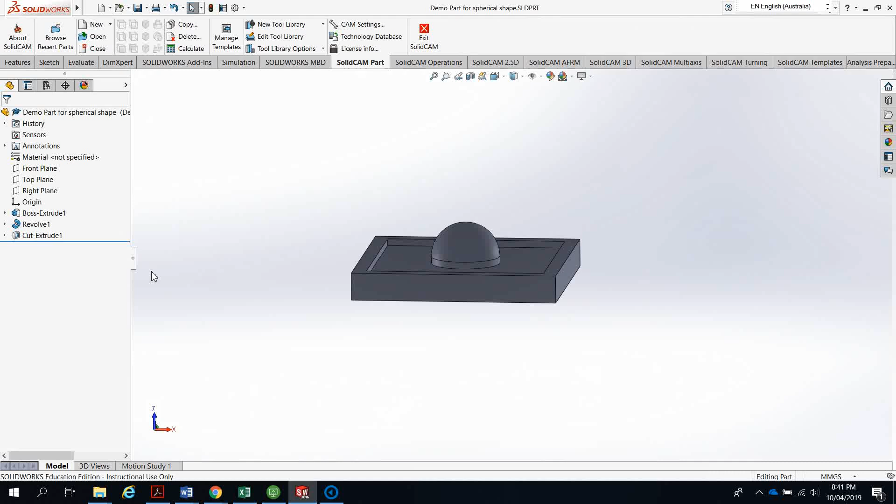Okay, so welcome to today's tutorial, and what I'm going to cover in this tutorial is going to be the cutting of the spherical shape using the SolidCAM package. So this is an example shape. It's not exactly the same one you have, but the spherical shape is once again going to have the radius

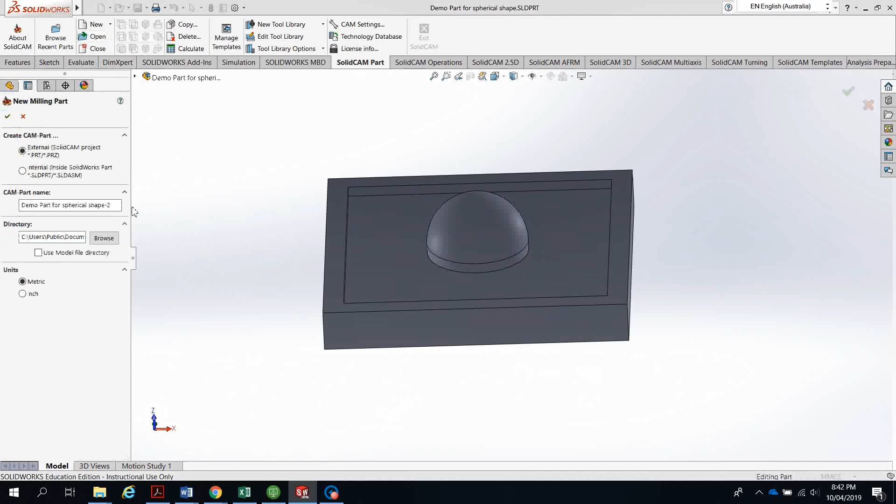of 25 millimeters. So first we are going to start with doing the new milling part, and we are going to use this one as an external part. In metric, say OK, and now the first thing we're going to do is choosing our machine. I will choose any machine, it's not going to be important now. I hope it's going to work as we wish it to work.

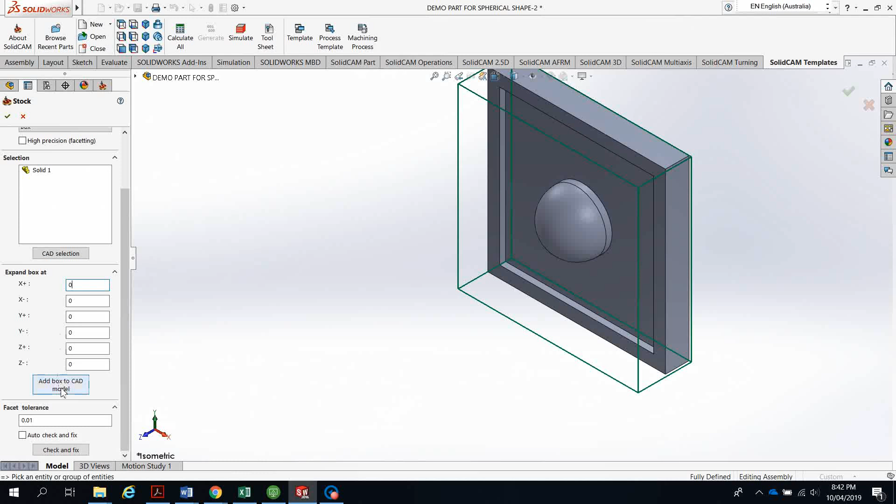So the second step is choosing the stock material. So you choose the part, and the software is going to generate the box around it. Now the most important thing is just remove the expansion of the materials. I don't want to have an expansion for that, because maybe I'm not going to do the cutting. Okay, and 0. Add the box. This will be very important to have the box around the part, and then say OK.

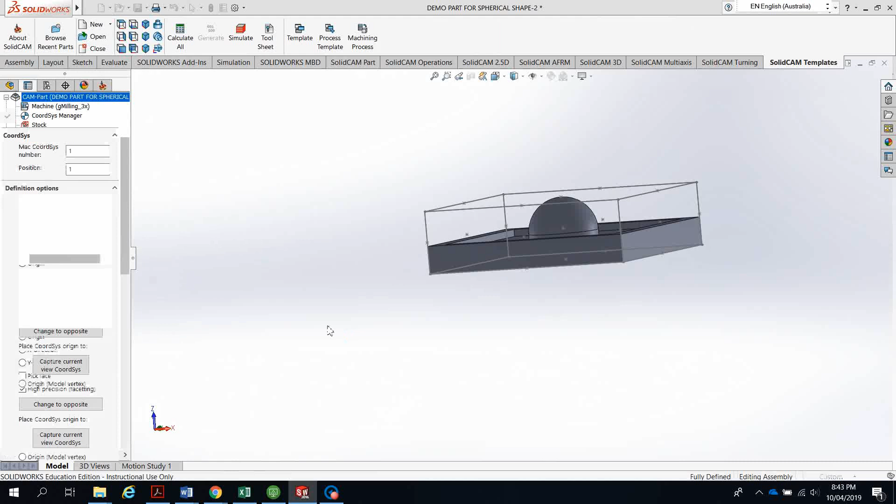Okay, I can't find the box. Stock. The box. Anyway, close. Okay, now the next step is going to be using the coordinate system, and because my system doesn't have a lower face to select, I will define that.

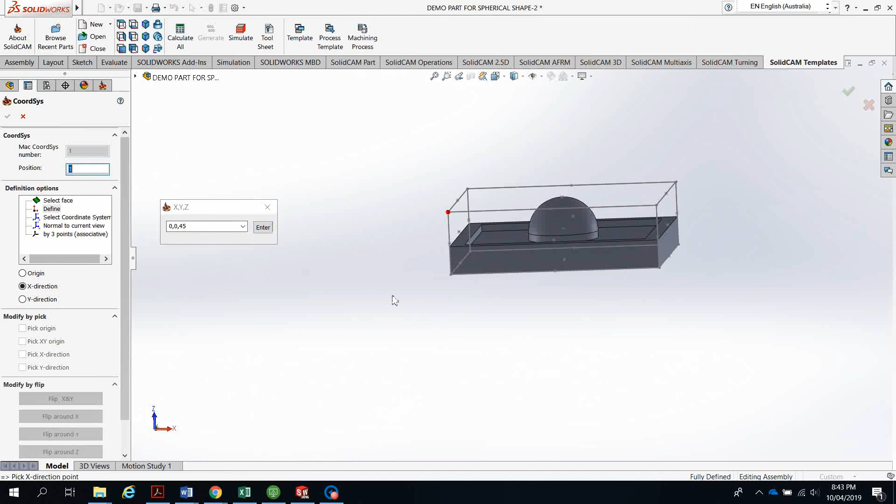Now this point is the 0 point, 20 millimeters, another 25 millimeters. This will make it 45 in the Z direction, but the X-axis is going to be 0, 0 for the Y, and 45 for the Z-axis. Enter that. The red point showing at the corner of the box, this red point is my datum point.

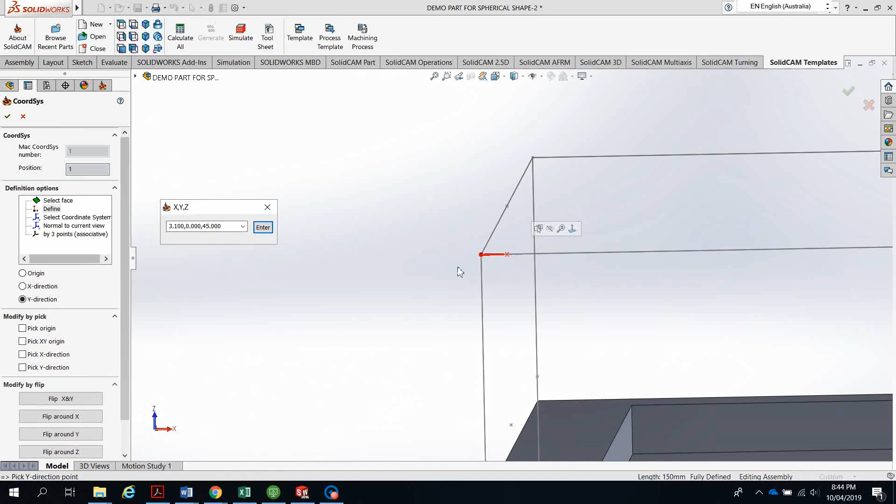The next step is we have the X direction highlighted. I will choose my X direction with this box. Choose a different axis. Just give me 1 second. Okay, now I'm going to invert that. Yeah, that's the X-axis, and this is the Y-axis, and this will be the Z-axis. So these are the coordinates I'm going to use.

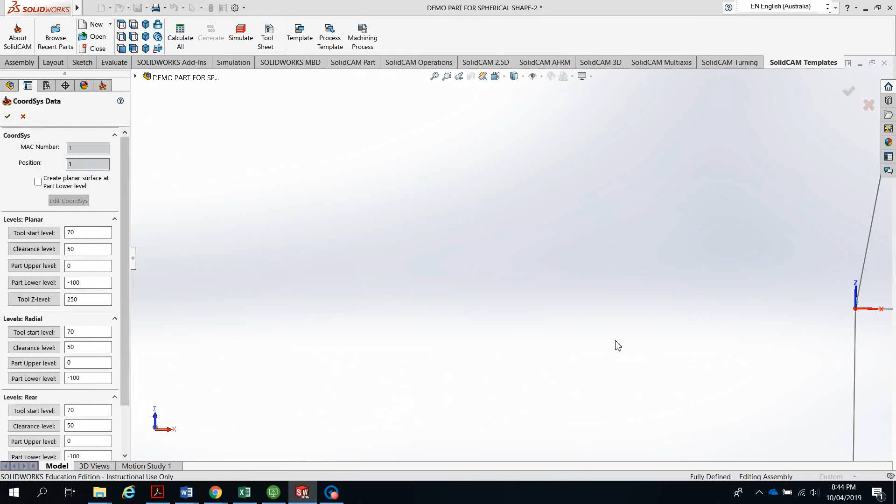So as you can see, the most important thing is when you have an error, just simply make the changes directly. Now accept that, and this will generate my coordinate system at the top of the block. I'm going to start to work on it. Accept that, accept the position you choose, and then we are going to go for the next operation, which is going to be the machining.

Now just remember, you're not allowed to use the iMachining now. You're not allowed to use the iMachining. Instead, we're going to do the step-by-step work until we finish the cutting, because it's required to do the simulation for each step individually.

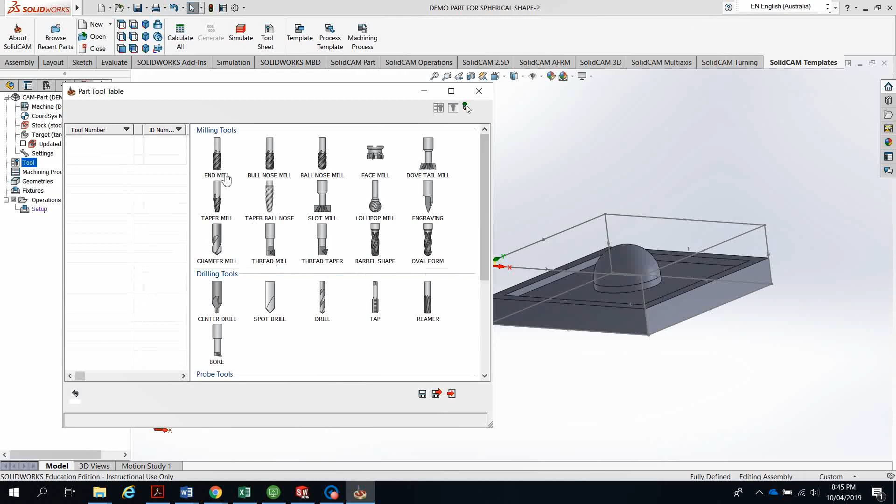Now for the selection of the tools, we can select tools from the list we have in the library. Now just remember that we have a face milling and we have a spherical shape, so we need to have at least 2 cutting tools. One of them is going to be the end mill, the other one is going to be the ball nose. So I'll go with the end mill cutting tool. I will change the dimension to be 10 millimeters diameter.

And now for the shoulder length, because I'm going to do the cutting for 25 and 5 millimeters, this will make it equal to 30, so the cutting length, the CL, is going to be 30 millimeters. Accordingly, the shoulder length should go up to at least 35 millimeters. Okay, now we're done with tool number 1.

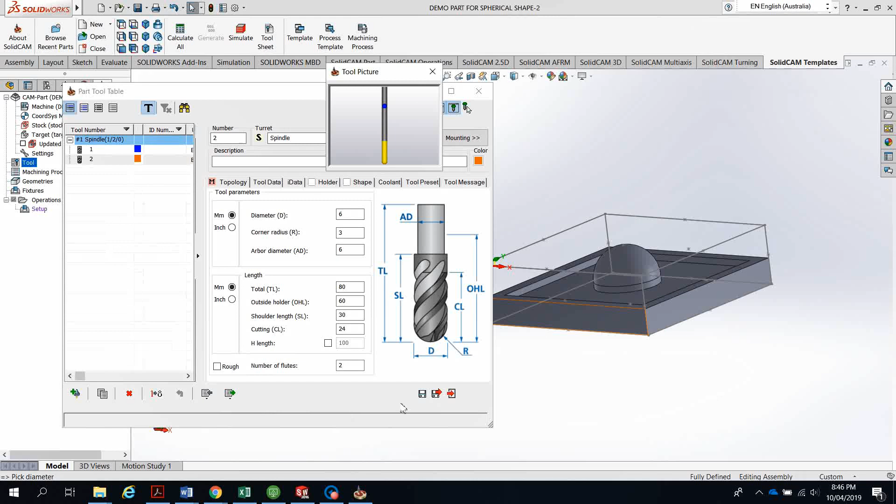Save this one and go to choose the other tool, which is going to be the ball nose, and I'm going to leave the dimensions as they are. So we can simply save and exit, and start with the operation. Now once again, from the list, add milling operation. You're not allowed to use the 2D and the 3D iMachining. You're only allowed to use the 3D milling.

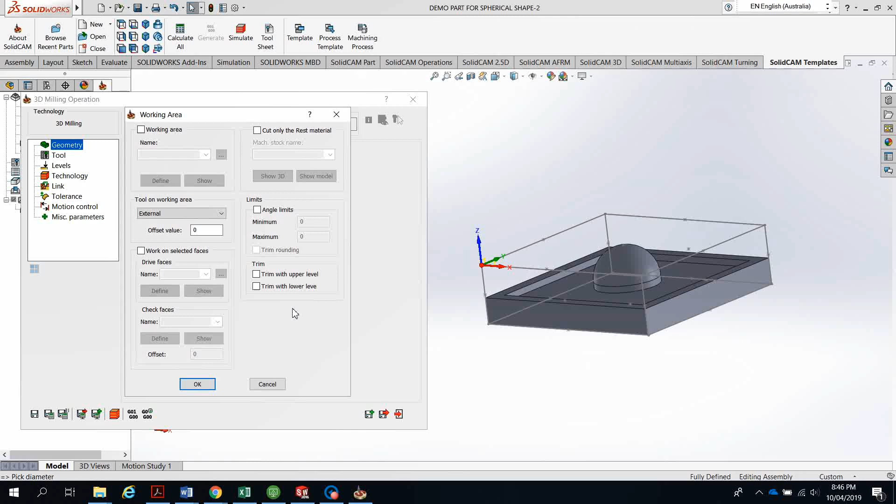Now for the 3D milling, we're going to choose the first operation and first define the working area. So the working area is going to be anything between this ring, that means after the cutting I'm going to have a cylindrical shape, and the outside is going to be this edge.

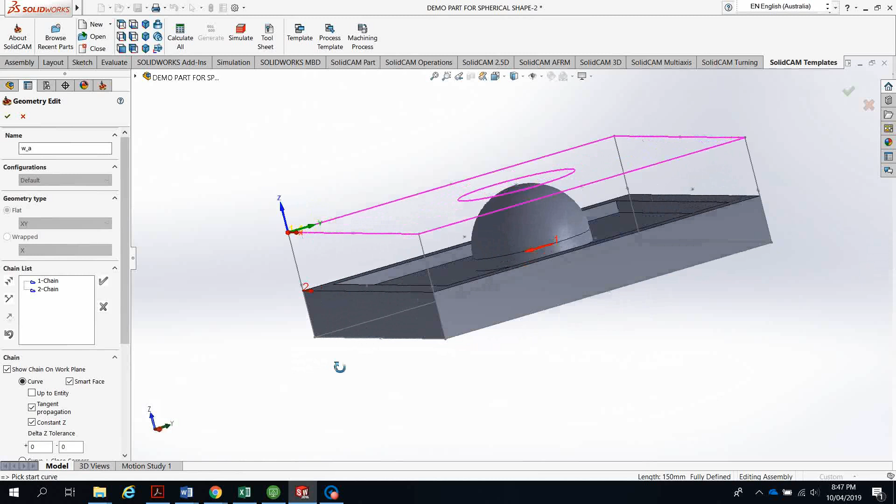Say okay. Now what's happening is that I'm going to cut anything between this circle and this square shape. Press OK. I have to define the face I would like to go to. So define that, and this will be the face I'm going to work to.

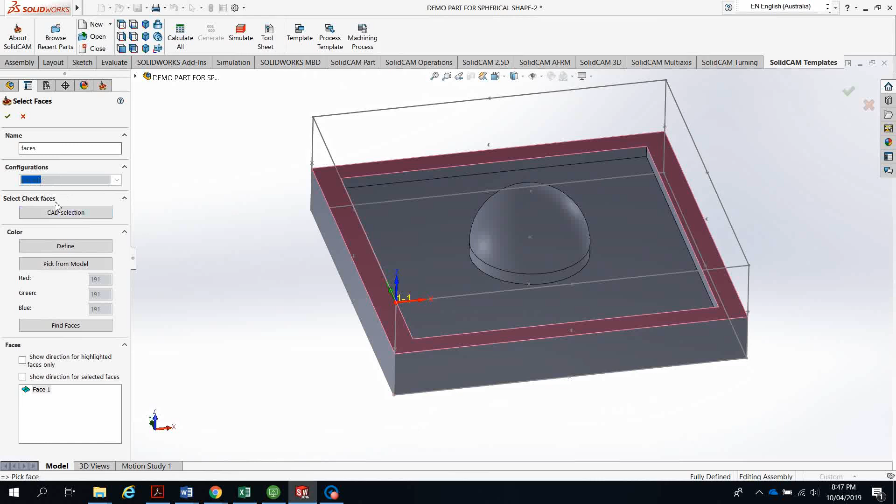I think that the configuration is going to be quite small, so I'm going to leave this stage. I'm not going to define the face now. Instead, I'm going to choose the level to tell the machine what to work to. Now that's okay for this one, and I will go for the tools, and the tool I'm going to use is going to be the flat cutting tool number 1. Say okay. Now it has been selected.

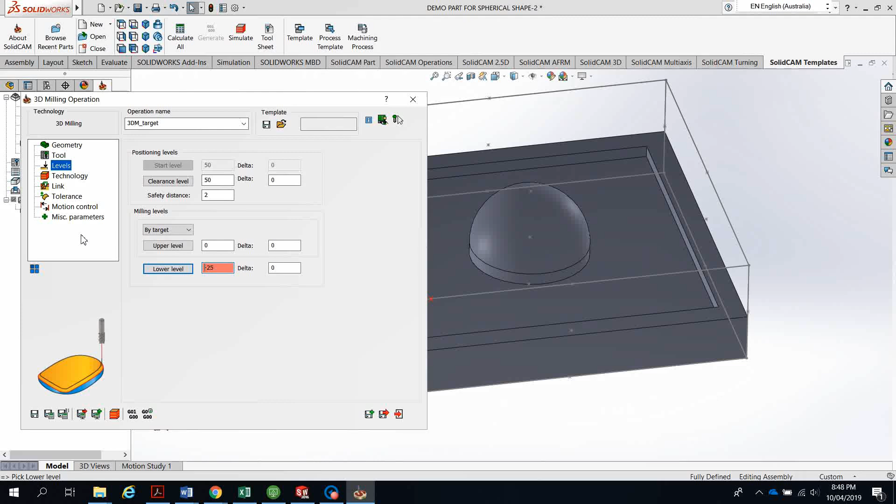The levels: my upper level is going to be 0, the lower level is going to be selected to be that, so it's -25. Say okay. Now the technology I'm going to use is going to be the contour cutting, and be sure that you are going to have acceptable values for the overlap and for the step over. That means the depth of cut for each time. You are going to select the depth of cut depending on your material. It's going to be the aluminium. The wall offset, I'll take this one to 0 and 0.

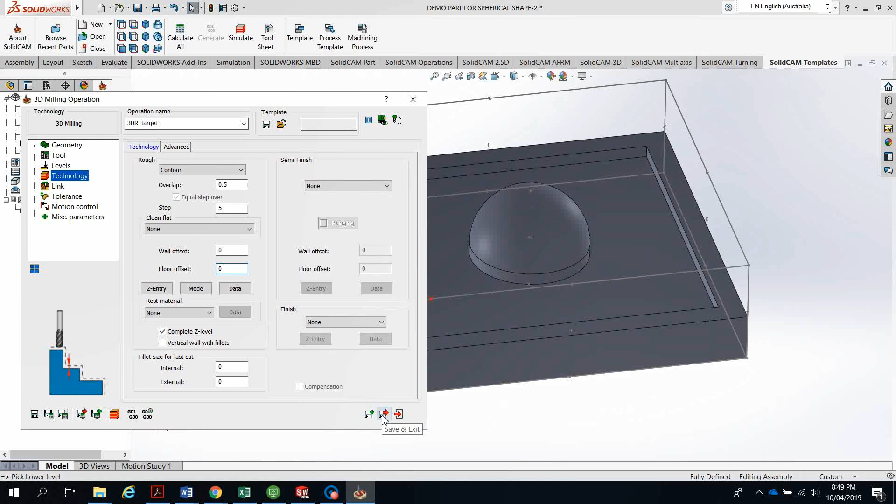Now I'm going to save and exit this operation. I will do the calculation for this operation to check what will be the movement of my cutting tool. So that's the tool path of my operation. I can simply simulate this one separately. Simulate. I'm going to use the solid verify, so it's going to show the solid. Actually, you have to do that in your assignment. You have to take snapshots for every step we are making and explain what you're doing here.

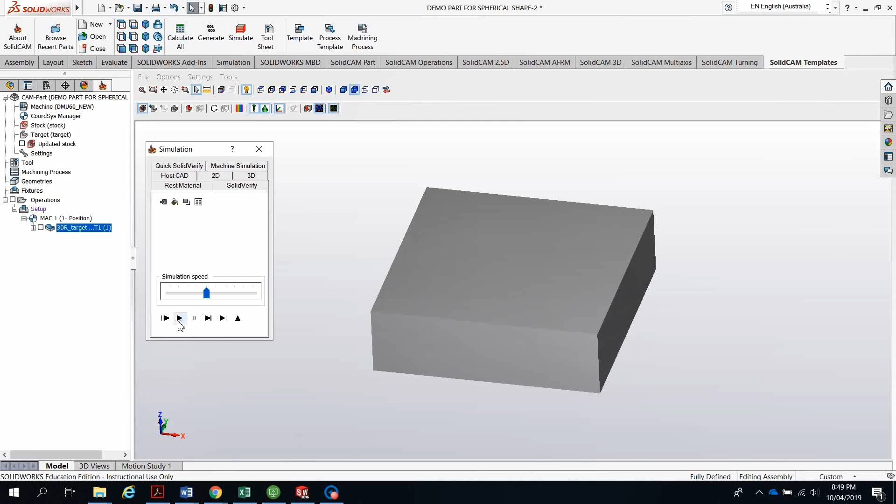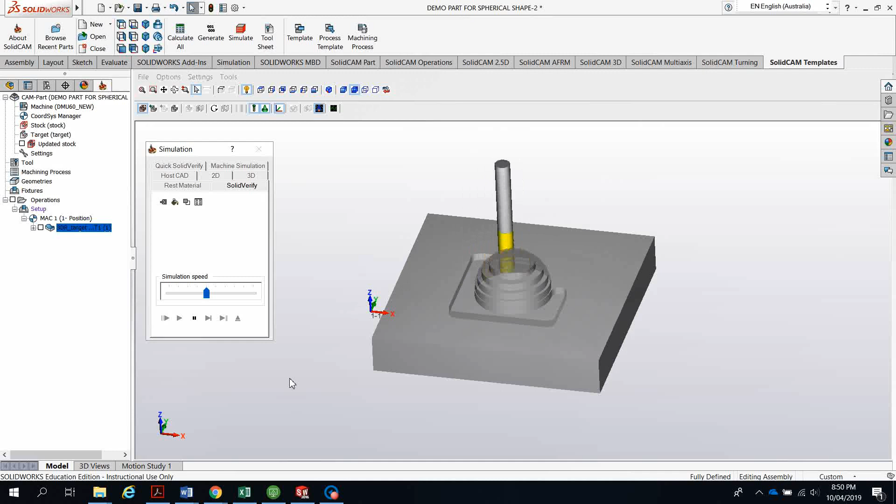If I'm going to slow down the speed and press for the simulation, that will be the cleaning process we're going to have for the cutting tool. Now you can see it is going to cut a pyramid shape in the middle, which later is going to be transferred into a spherical shape. Okay, now we took everything around to the level of 25 millimeters lower than the 0 point.

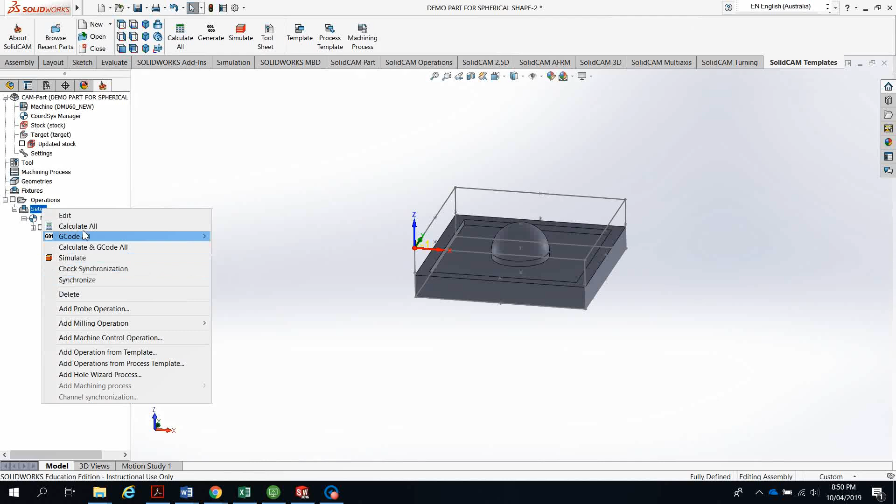Now the next step is going to be, I don't want to change my cutting tool at this stage, so I will do the pocket before I'm going to do the spherical shape. So add another milling operation, 3D milling. And now I'm going to define the area of the cutting once again. Now the area of the cutting I'm going to have this time is going to be everything between this edge and that edge. Yes, okay. And this one.

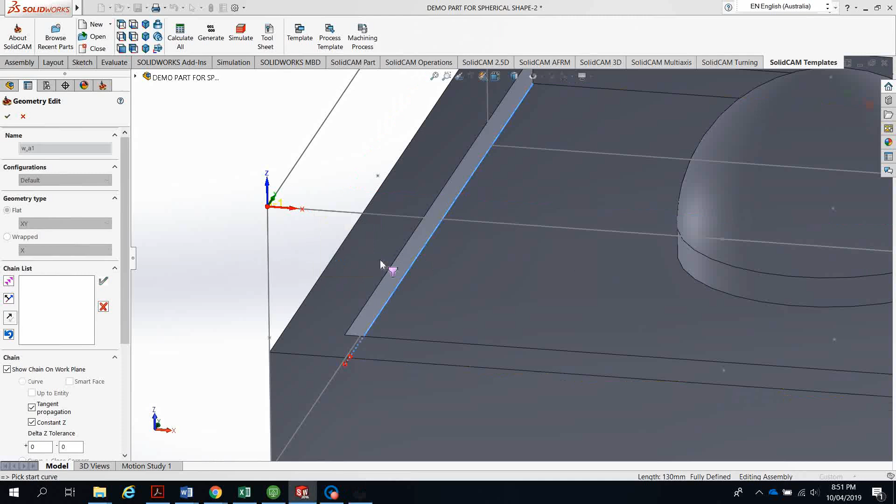So I will remove all the materials between these two areas. Say okay. I can define now what the selected faces are going to work at. So just click that. That's the face I'm going to work at. Say okay. The tool will remain the same tool, so tool number 1. Say okay. The levels 0. No, the upper level is not going to be 0 in this case. The upper level is going to be this one, minus 25, and the lower level is going to be that, minus 30.

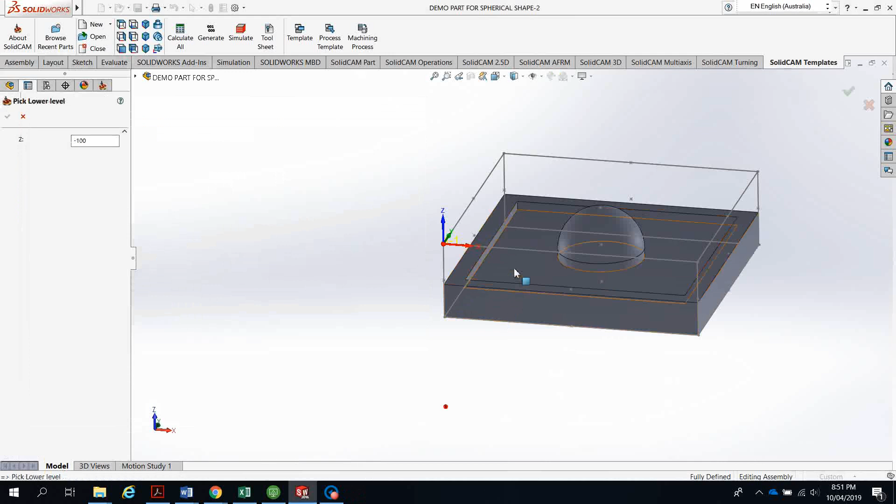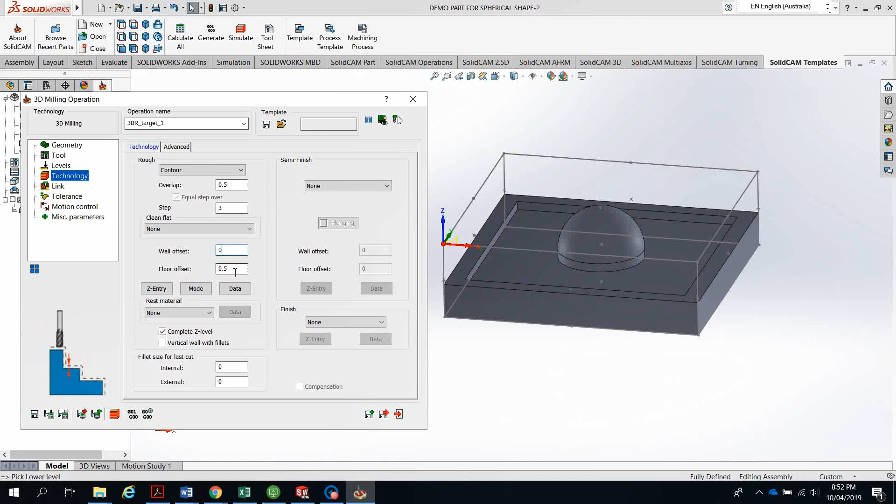Okay, and the technology we are going to use once again is going to be the contour, and the maximum level is going to be 5. So take this one to 2 each time. So it's going to cut 2, 2, or let's make it 3 and 2. So 3 and 2, and reduce this value to 0. And save and exit, and done. That's operation number 2. Calculate this operation.

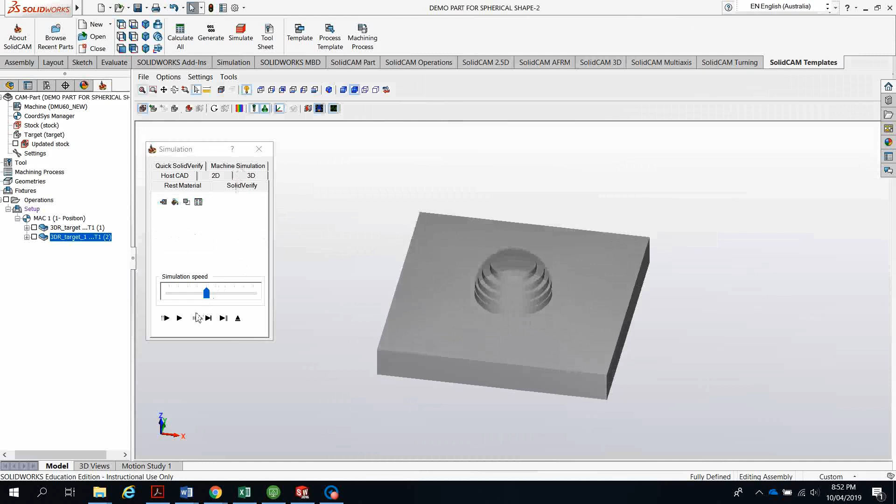Okay, now the toolpath has been generated. It's going to be 2 levels, and simply I can simulate this one as well. So SolidVerify. We reach this stage. Play.

Now the most important thing, you can see that the yellow area on the cutting tool is always going to be sufficient to go to this depth. That's why I simply just increased the value for the height of the cutting and the height of the shoulder. And now we have the cut ready.

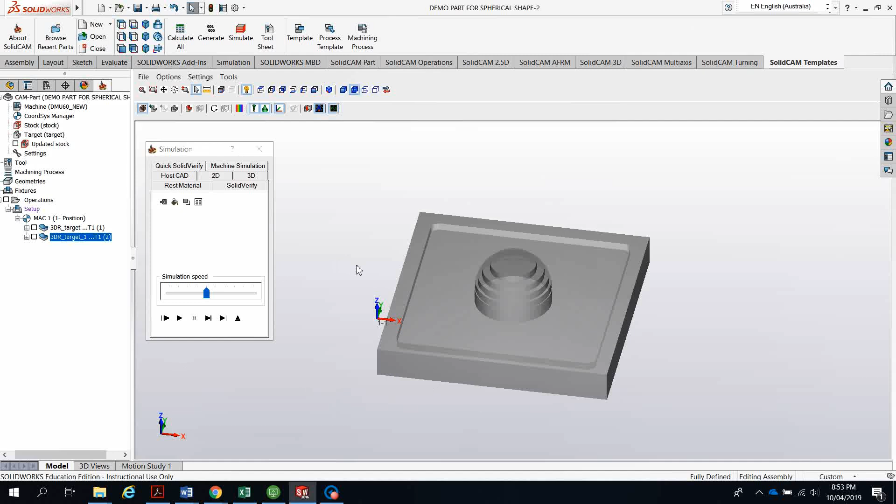Now the next step is, now just check something here. Now you can see that the cut has been generated, the fillet on the side. It was in a correct sequence, and this is expected because we mentioned that the cutting tool is always going to have the fillet cutting. Now the last stage is going to be the cutting of the spherical shape.

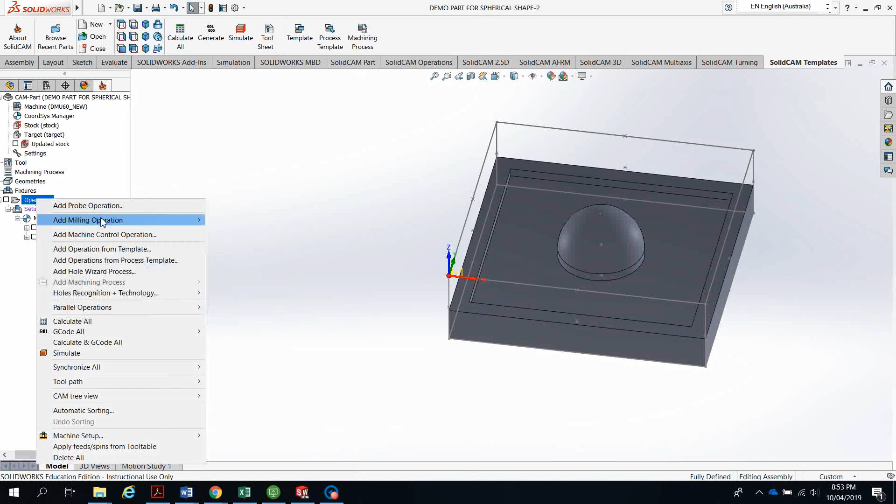Now I will show you how simple that is. 3D milling. Define the working area. So now I'm not going to use a working area, I'm going to use a surface. Define the surface, click here, that's it. Yes. And the tool, I'm sorry, I have to make sure.

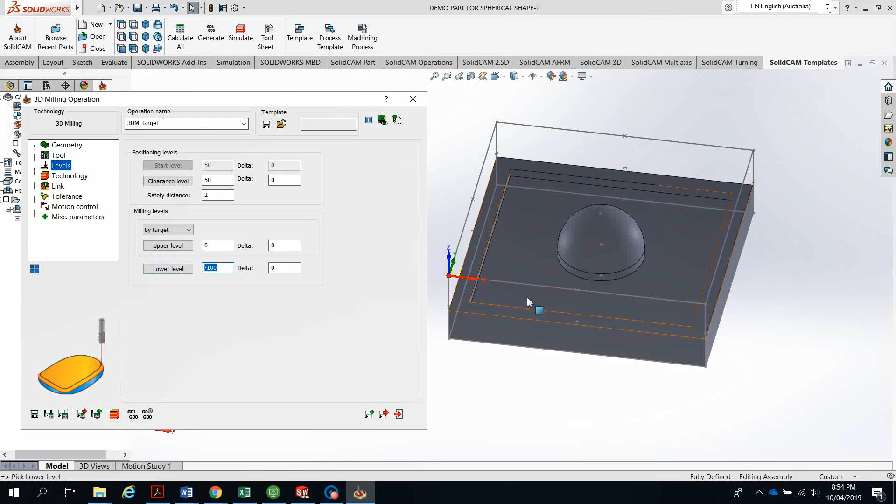The tool is going to be the ball nose. So go with tool number 2 this time, say OK. Now for the levels, the upper level is 0, the lower level is going to be selected now, and you're only going to tick that. It's minus 25.0001. Say OK.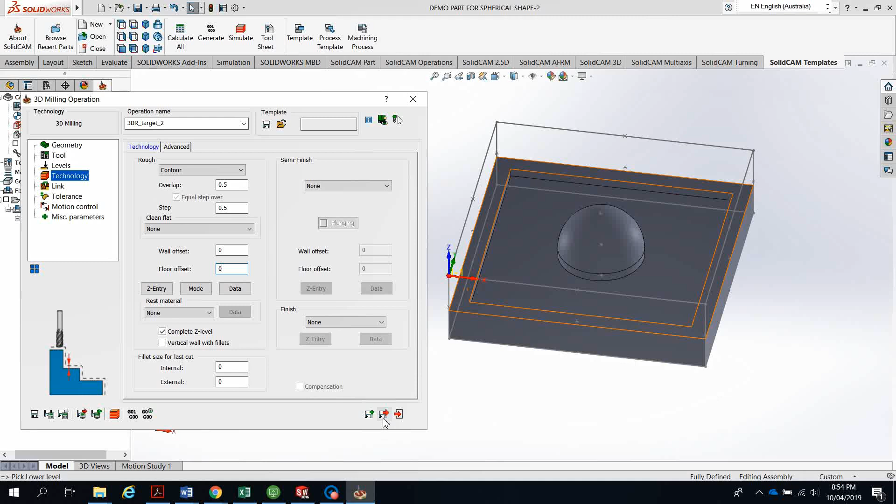And the technology we're going to use, I can use a contour, because actually it's contour cutting. And I can reduce that as much as possible. I'm going to use 1 millimeter, 0.5 millimeters. The wall offset is going to be 0 and 0. This will take a longer time, but the outcome is going to be better. Save and exit. Calculate that.

Now, these are the complicated toolpaths we're going to have, but we're going to have this spherical shape at the end. Now, if I'm going to simulate that, do the solid verify, play. I don't know why it's doing an extra cutting. Shouldn't do that. Oh yeah, I think because of the face. Anyway, I think we should speed that up. Otherwise, we're going to take forever.

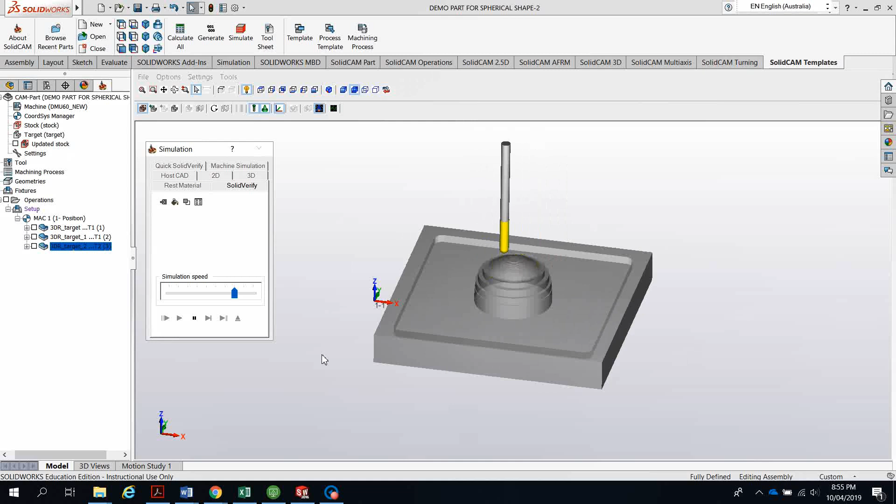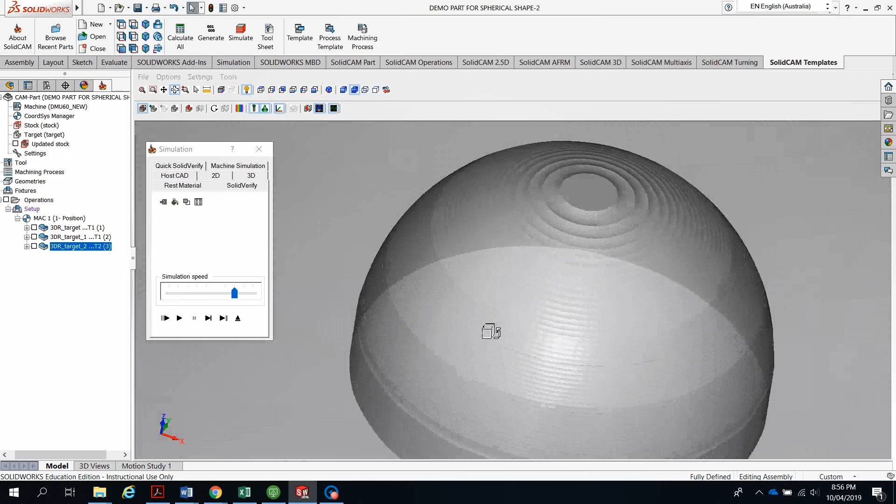Okay, now if we get close to that, we got this shape. Now if I would like to reduce these shapes, I can simply choose a different setting, close that, and go to this one and do the editing. Where's the editing? Toolpath, transform, edit. Okay, so the overlap is going to be reduced. So the minimum overlap is going to be 0.1.

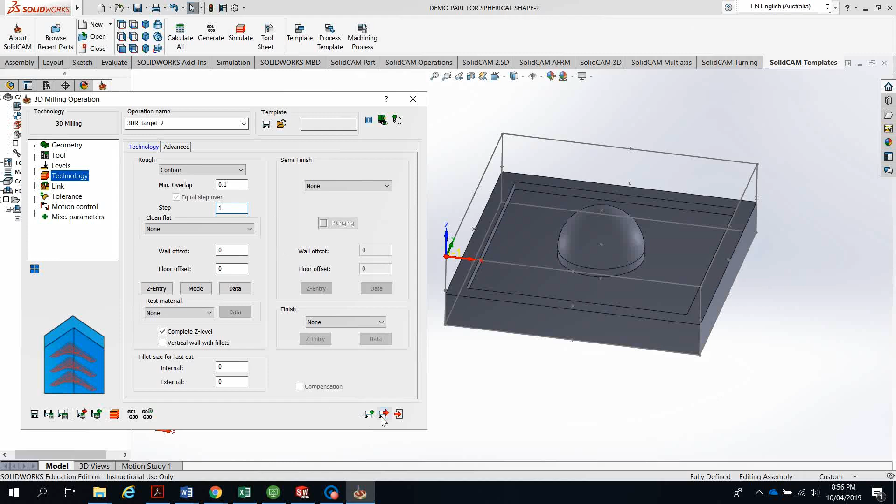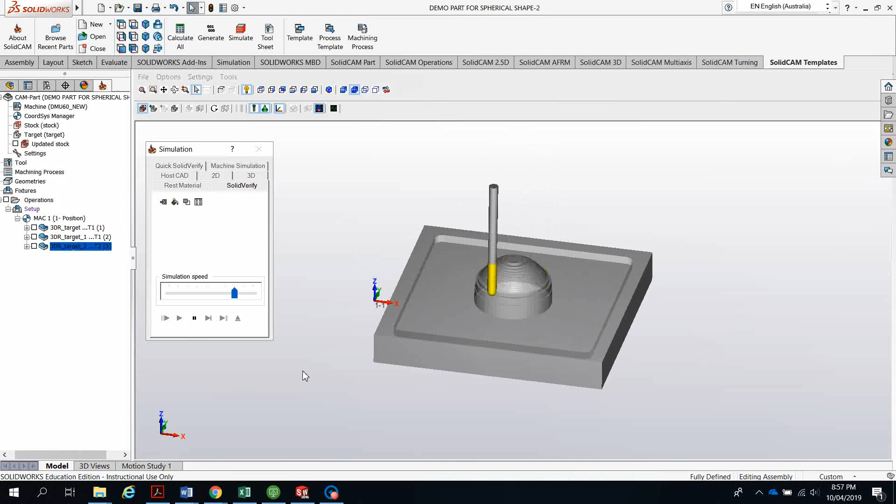Okay, and I will take this one to 1 millimeter at this stage. Recalculate. And run. So verify and run. Okay, now we still have a bad surface here. So I think that I made two mistakes.

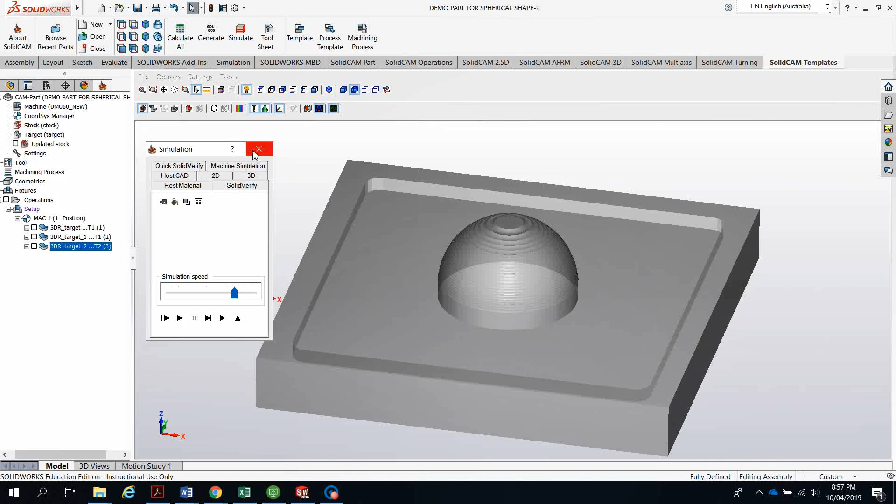The first one, actually I have to expand the stock to a higher level to generate this spherical shape at the beginning, as well as I'm going to simply change the cutting tool or modify the cutting tool. I will do this one, and the diameter is going to be 4 millimeters. Save and exit. Yes. Okay, calculate that.

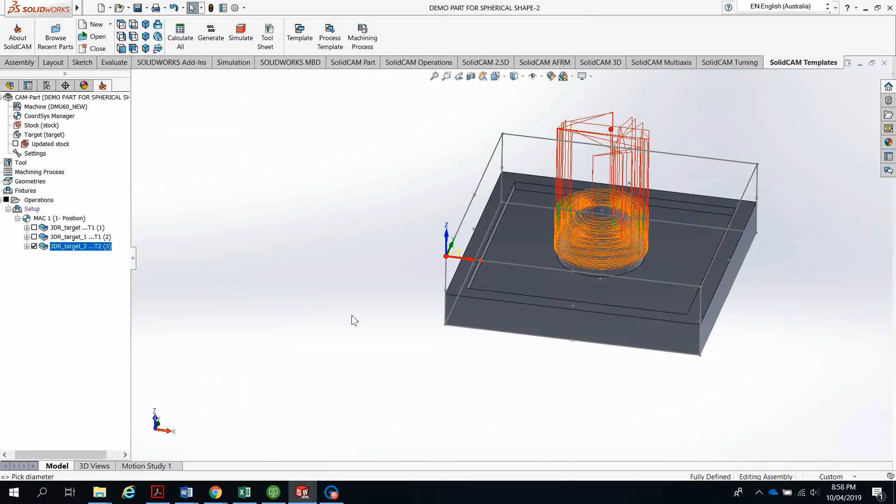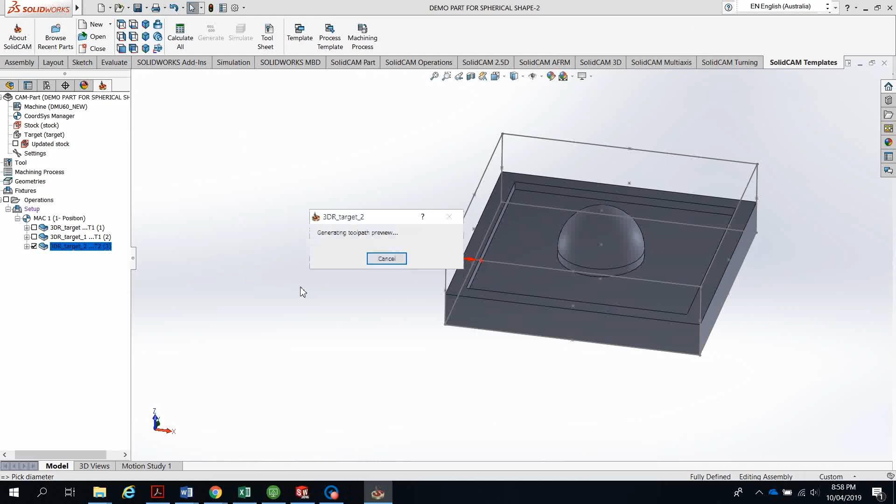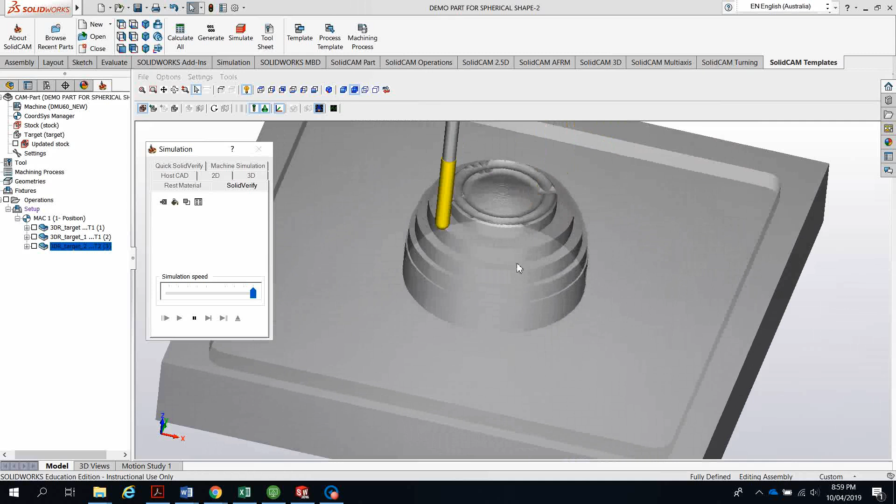Actually, let's just show you the toolpath. I'm going to repeat the same thing with the SolidVerify. Do some calculations. You can see that the surface finishing became better than the previous one. Yeah, now I got almost the perfect spherical shape.

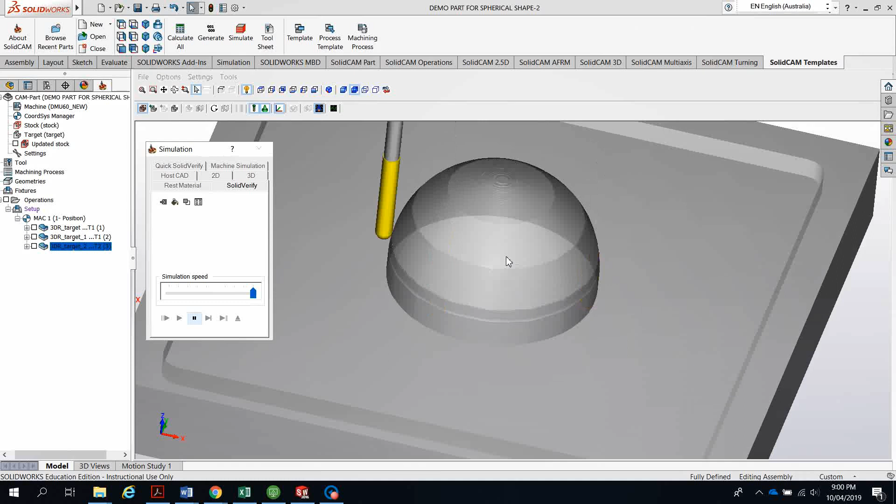Done. Okay, now we have better surface finishing. Sorry, that's too close. Okay, so we got better surface finishing for this spherical shape we would like to generate. Okay, so I think I explained everything now.